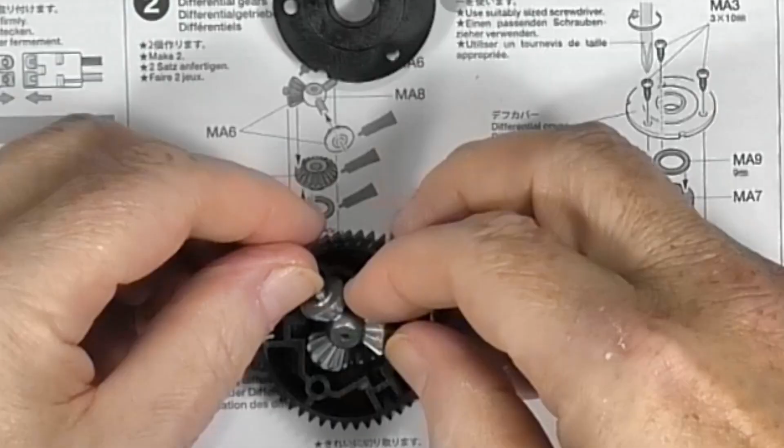You do have to grease these up and it gets a bit messy. We've got an MA9 9mm shim that goes in there, then a crown gear, as I call it, 3 planetary gears that go on, and 3 more which then slot in. Then another crown gear, and lastly another 9mm shim, and then the case, or the lid of the case, goes on.

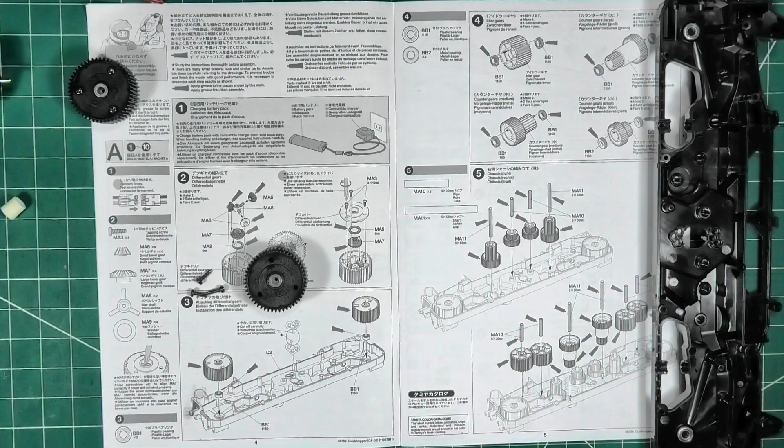There's some cutouts to line up and go like that. And then we've got 3 10mm M3 self tappers. So I'll get on and finish that and we can jump on to step 3.

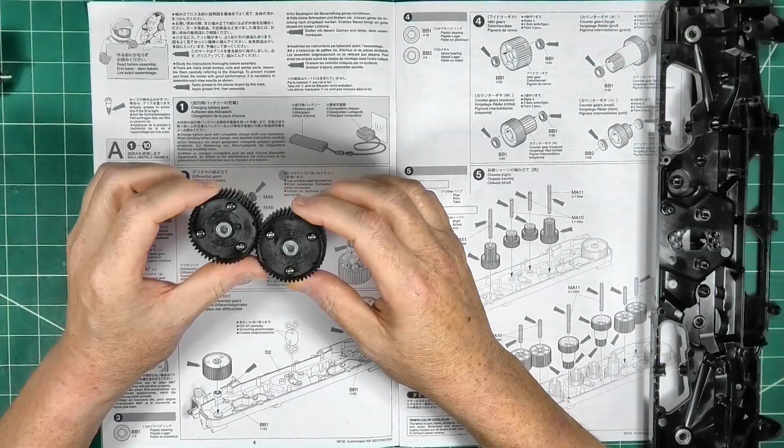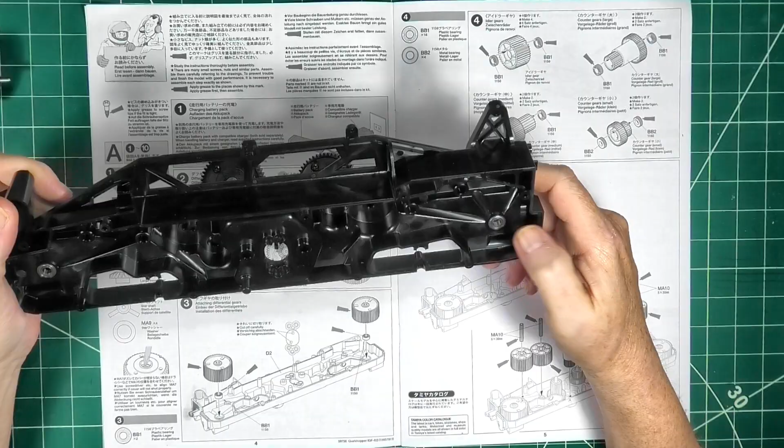Okay, so here we have both diffs made up, and we can move on to step 3. We've got to put these 2 1150 bearings in. It comes with the kit with plastic ones, but I've gone for the upgrade, and I've got to be honest, these 2 are really tight, so be warned.

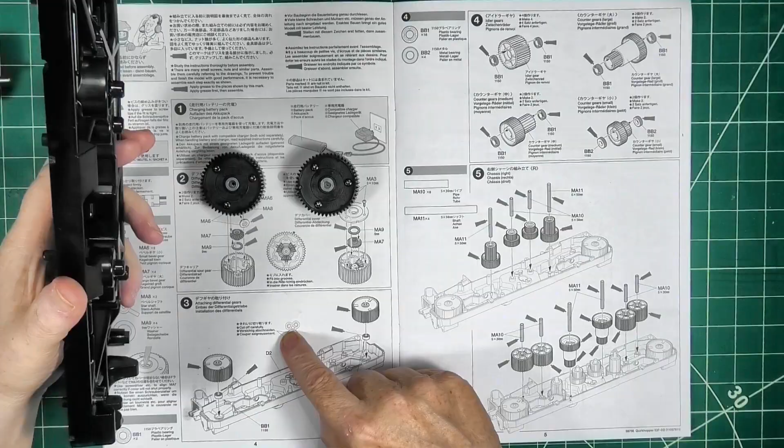There's a note here to cut these little bits off. I don't know if you can see. So I've done one, let's do it from that end. There we go. And then I just use a scalpel to try and tidy it up because you can't get right into it. And that'll do - there we have the hole cut out.

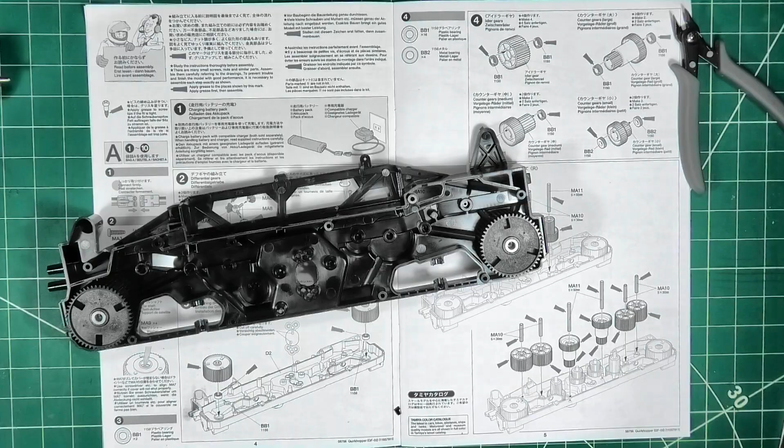And then we put these in this side, or even this way round, ready to continue. Okay, so step 4 is just installing the plastic bearings, or in my case the ball bearings, into the idler gear.

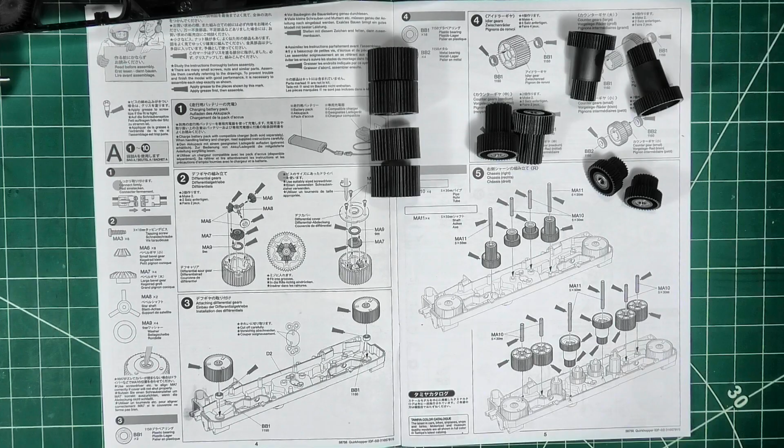There's 4 of them, and then the other 3 sets of counter gears, and it's quite easy. You just slot in like so, and they are various degrees of not very tight. Just to show you, that's used 20 of the ball bearing kits I've got. So that's that, and we just need to get the stuff ready for step 5.

Okay, so step 5 seems to be in 2 parts. We've got the first part, which is all the counter gears, and the second half, which is the 4 idler gears and a further 2 counter gears.

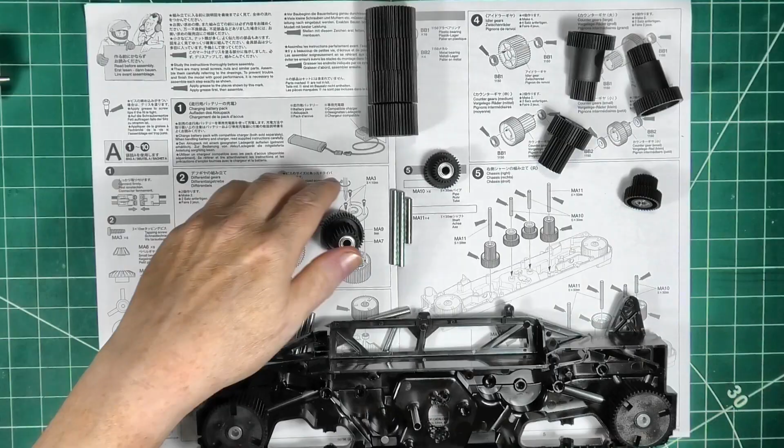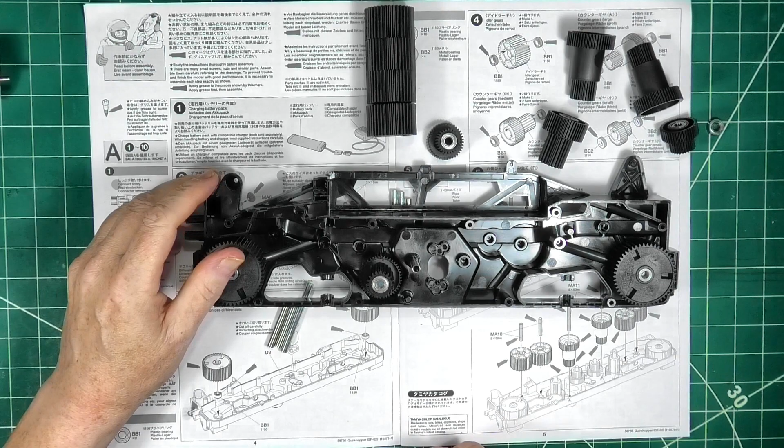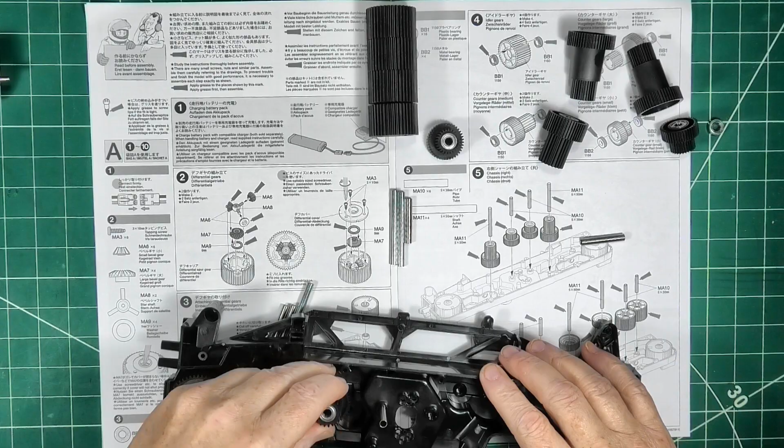So we've got 5 by 30mm tubes and 3 by 50mm solid bars. It doesn't want to go in. Whoops! Have I missed the hole? Yes, I think I might have done. Think it must be that hole. Yep, that hole, but definitely getting too old for this.

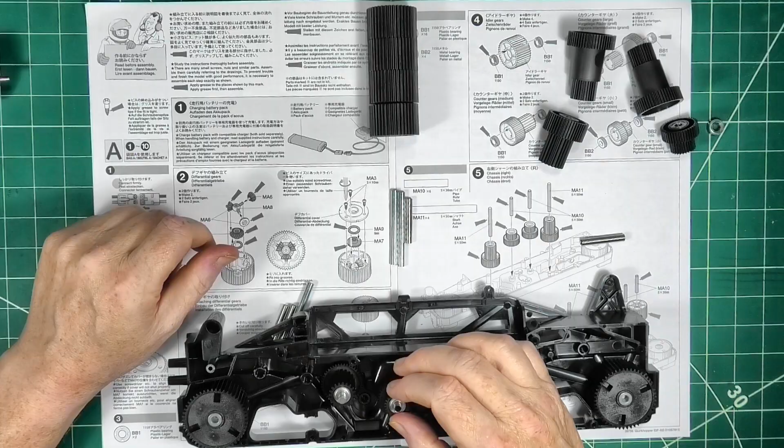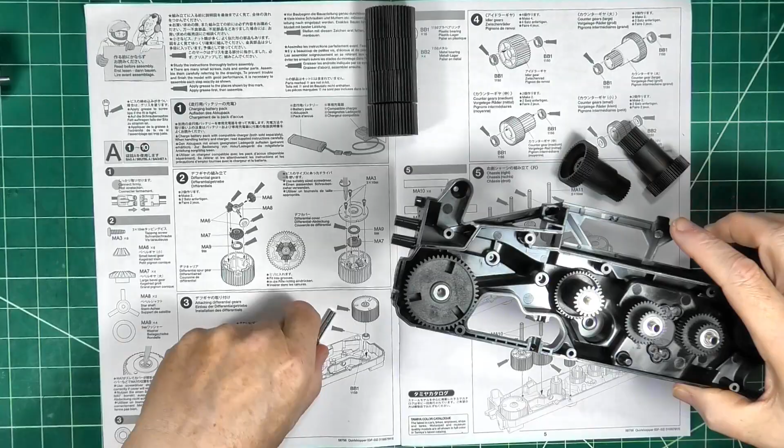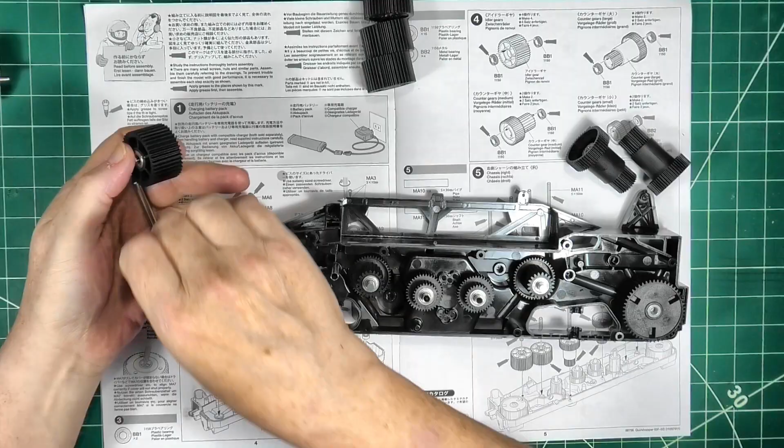And then the shorter counter gear goes on like so. And then we can move on to these 4 counter gears. Width - so we've got 1, 2, 3. Oops, where's my other one gone? There it is.

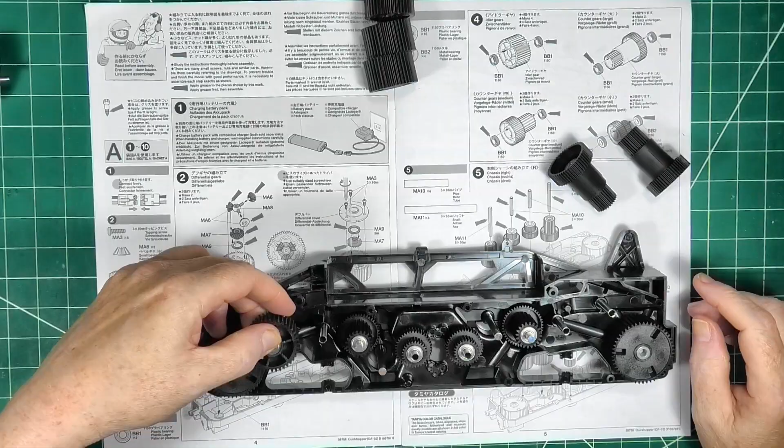And these 2 down here, I think, I am assuming. So they're going like that. And then there we have diff, idler gears, counter gear, idler, diff.

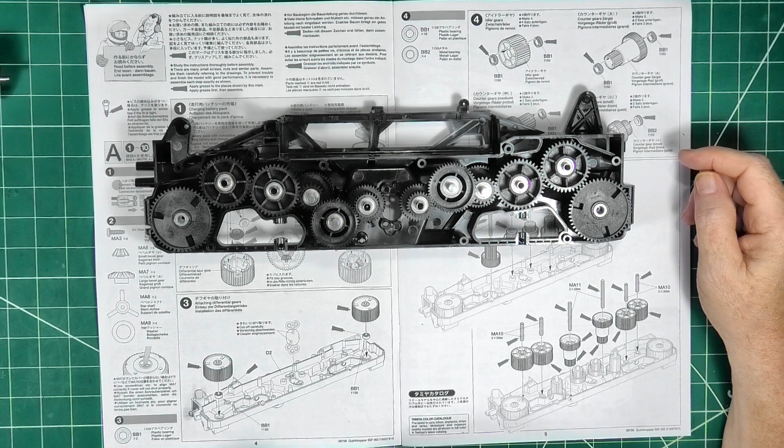Just 1 or 2. So I think the next step might well be joining t'other half to it. So I'm gonna go away.

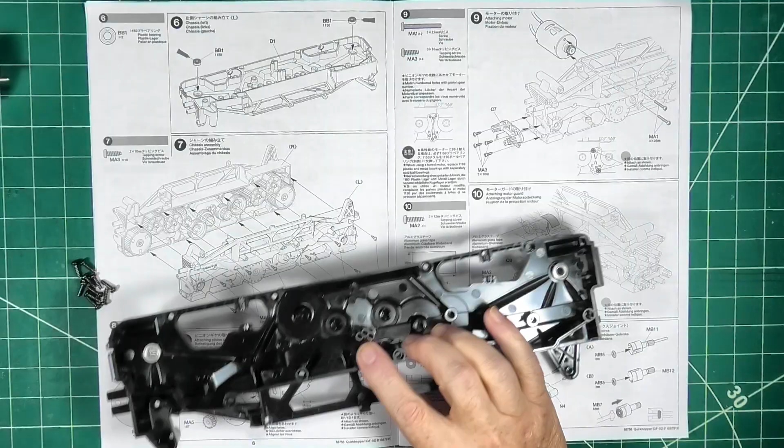Okay, steps 6 and 7 are preparing the second half of the chassis gearbox thing and screwing it together with 10 self-tappers. Now, just to show you how hard these are to get in.

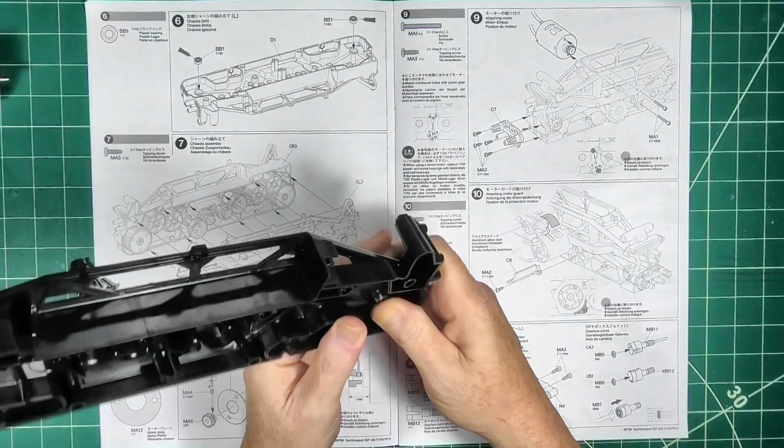There we go. So I don't really know why these ones are so tight, yet the ones on the diff or the gears are quite loose.

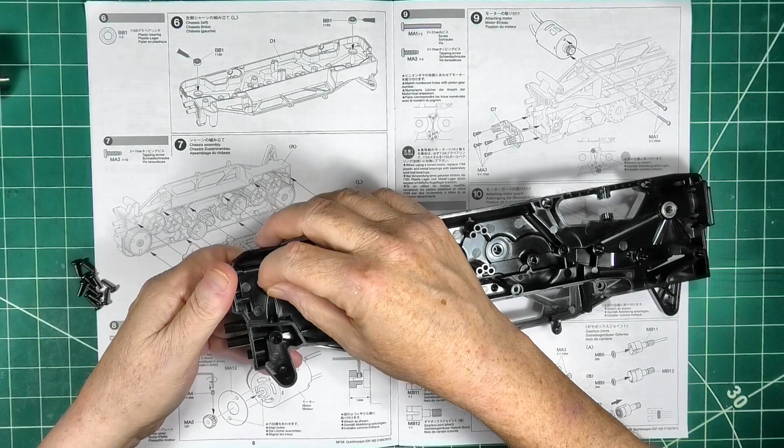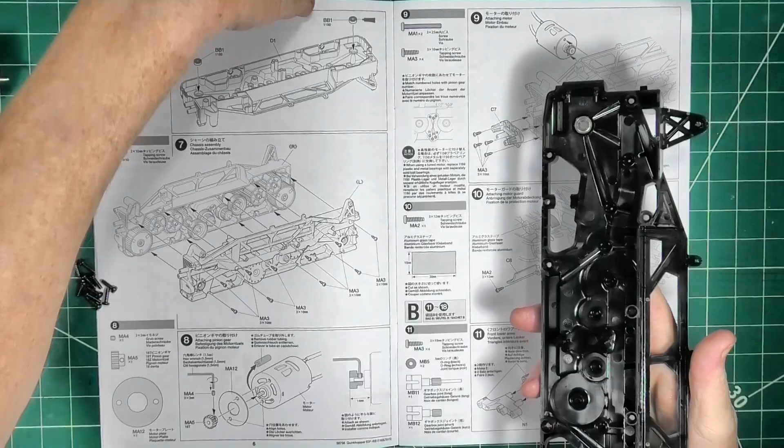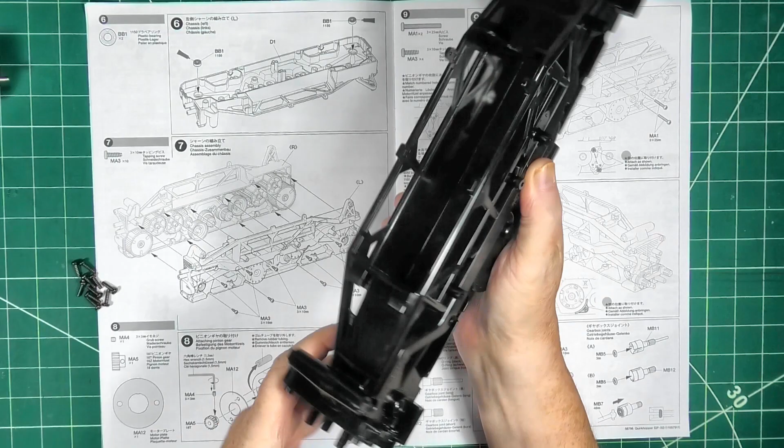But yes, I've had to take them out and retry. There we go. Oh, that one went in a bit easier. And then, God. Oh no, Tony. We have to try and line it all up and get it in place, which is easier done than said. So, as you can see, we've got lots of screws, so I'll get cracking.

I'll just try and line one up. I think that's one. And we'll go around and do all the others and join you shortly.

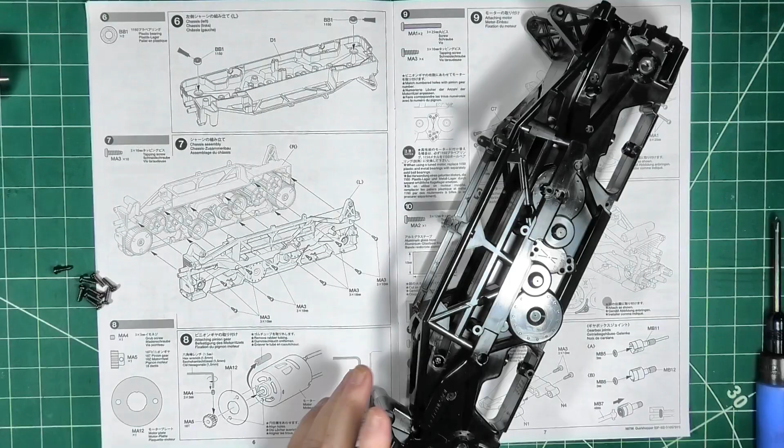Step 8 is attaching the pinion gear to the motor, and the first thing we've got to do is put this heat guard, dust guard on the actual motor, line it up with the holes, push it down, and then we can pop the pinion gear on and start to tighten it up.

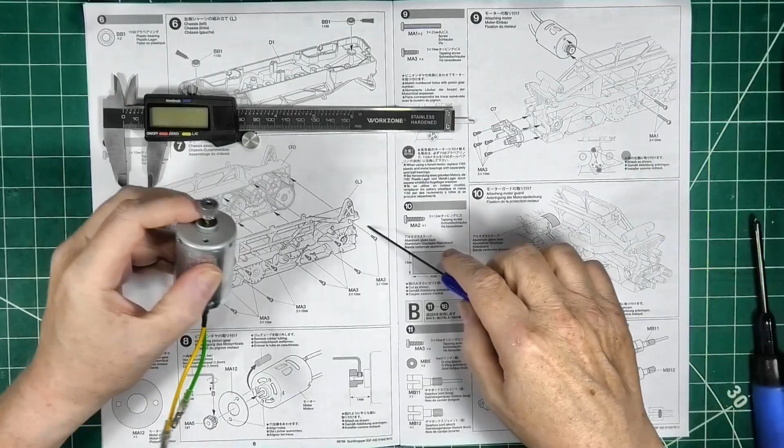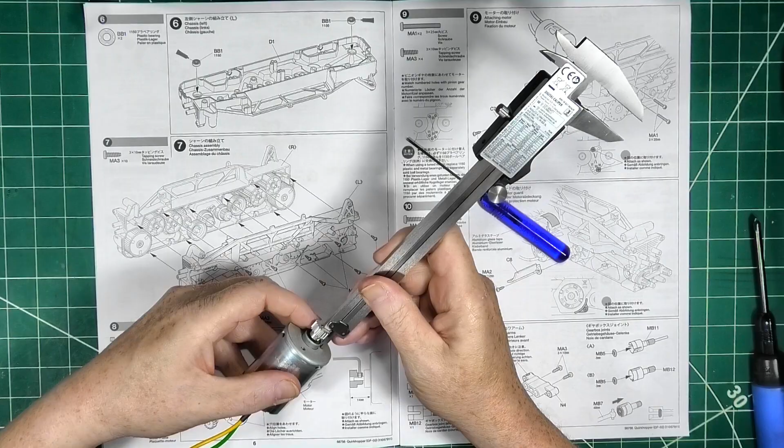And then there's a note here to say it's got to be 14 millimeters. I think I've tightened it too tight. Somewhere around about there. Yep, that'll do. And if we can tighten it up.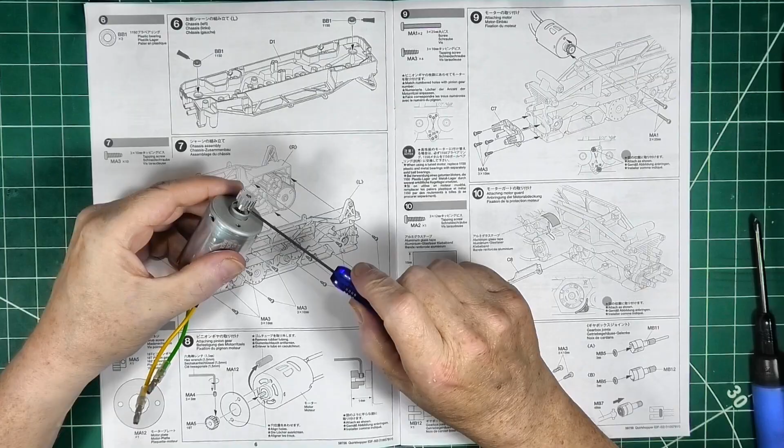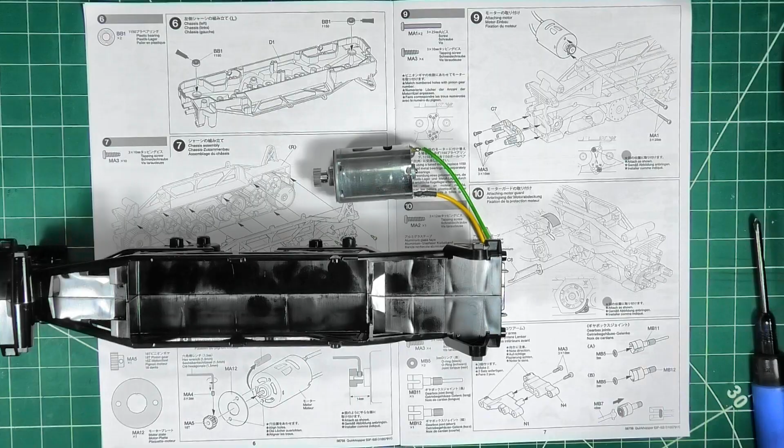Right, so according to the manual, it's an 18 tooth pinion gear. So we need to get, in step 9, 2 great big long screws. And there's a note here, so we've got that one there for 18 and that one there, and we can either have 17 or 20 as well.

I knew that would happen. Right, so oh dear. So the motor goes in there, and I'll do it all off camera because I'm having no joy in front of the camera.

The second part of step 9 is installing C7, which is possibly the bumper mount. So it just goes on there with these 4 10mm screws. So we'll crack on and move to step 10, which I will show you in a bit more detail because I've not seen this before. But anyway, wait right there.

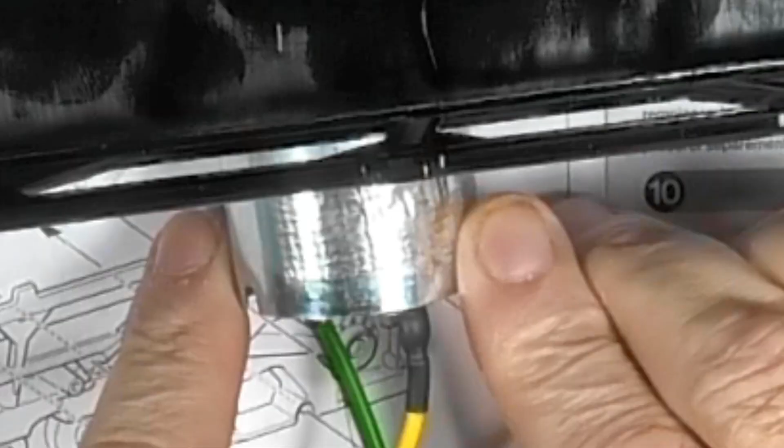Step 10 is installing this aluminium glass tape. For some reason, never seen this before on a Tamiya kit, and it goes over this slot in the top, sort of like that. And then we've got this part C8, which looks like it goes like that with a 12mm screw. Like that. So there we go.